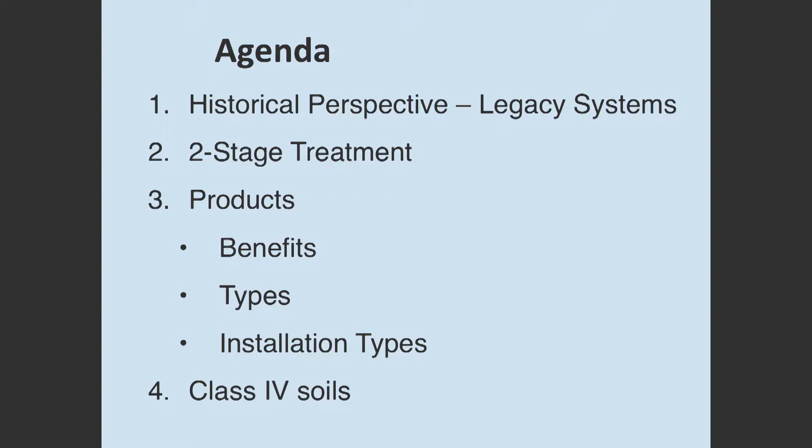All right, so we're going to talk a little bit about historical perspective, the legacy systems as I call them, and we'll talk about two-stage treatment. We'll go over the products and talk a little bit about class 4 soils, which are a little challenging.

All right, so let's give you the historical perspective. How did we get to where we are today? All right, so this device here was awesome. It was incredible. It did a great job of protecting public health.

It didn't do so good in the cities because the cities were too many people, and storm water washed everything into the storm gutters and rivers and streams. People really got sick in the cities, but you'll see if you've ever studied any history, there were times in the cities where everyone got sick and everyone went out to the country.

And that was the reason, because the cities couldn't handle it. So in the country, we did a great job until what happened? We introduced indoor plumbing, right? So depending on where you were in the country, this may have been the late 1800s, may have been early 1900s, but at some point indoor plumbing is introduced.

So it took all forms and fashions, but you see the outlet here and the one prior. Here you can see here it says to septic or sewer, so everything went out, but at the time we still only had this.

So where did the sewer line go out of the house? Well typically it went right into the base of this thing, right? All right, and it was a nice pit, but what was the problem? Not enough capacity, right? Too much water coming in.

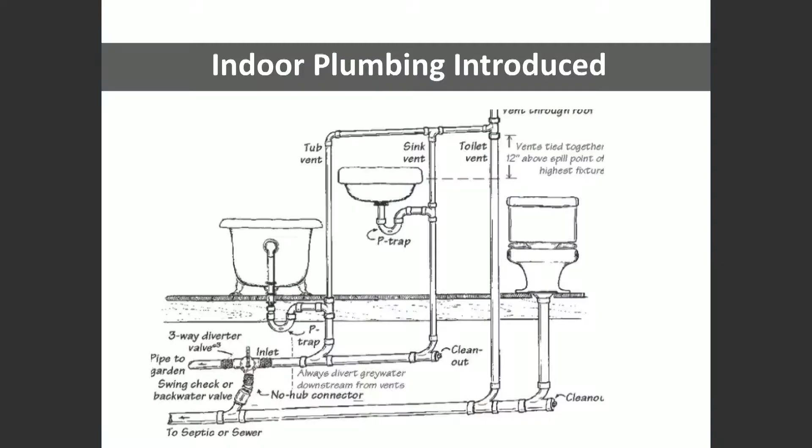So then we jumped to this. Okay, we had the pit and the pit latrine of the outhouse, and then we said okay, let's put in a septic tank to get rid of that because we don't need the building anymore. And then we put in the tile pipe. And the tile pipe at first, when they extended that out from the latrine, it was just open joint, dig a trench, open joint.

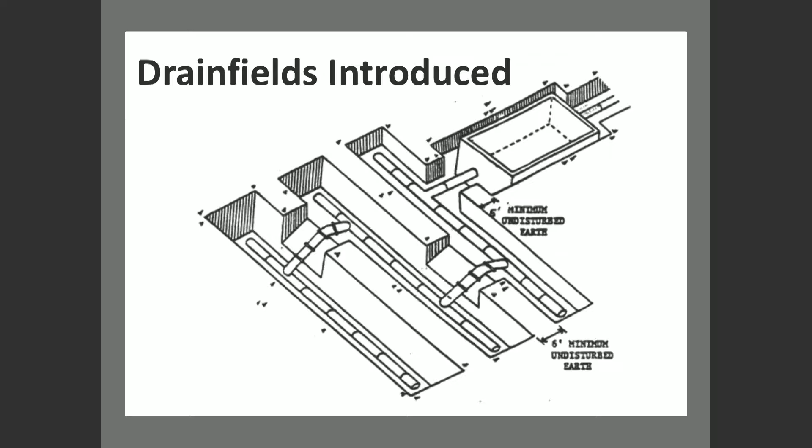And then someone came along and said okay, we want to expand the capacity of that. How do we do that? Oh, let's throw in some gravel, let's throw in some stone. So that's kind of the evolution of a drain field. Indoor plumbing kind of forced it to occur.

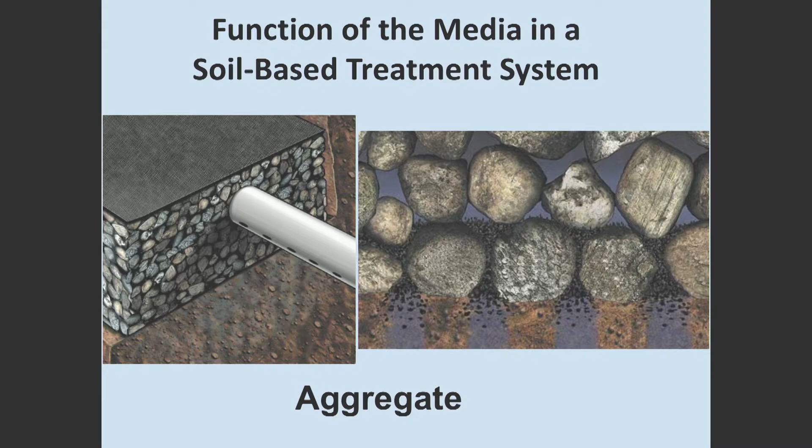So what was the function of that media? Why do we put media in the trench? [Audience: Storage.] Here it is right here, and storage is one of them.

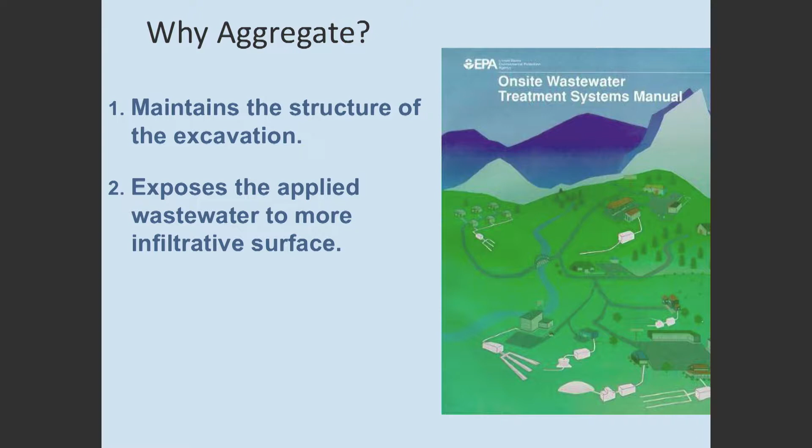Well, first of all, this comes right out of US EPA. It maintains the structure of the excavation. It exposes the applied wastewater to more infiltrative surface. Now what this means is when we had that open joint pipe, it created more area. And then it provides storage. So that's kind of the function of what the media is.

So stone is what we call a legacy system. It's from the last century. There are new products that we're in the 21st century.

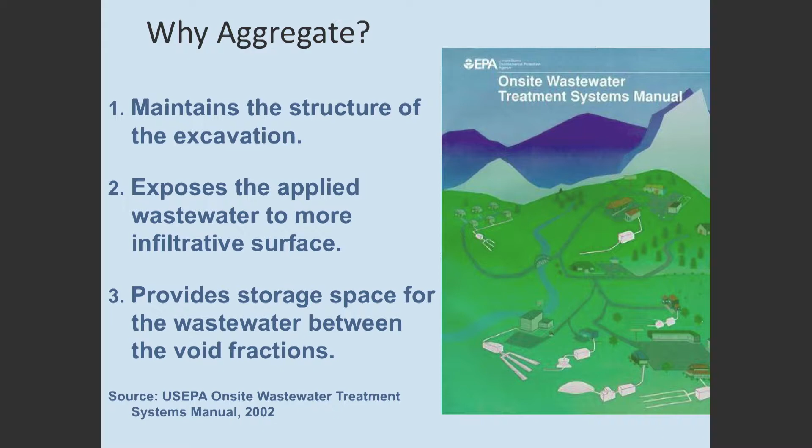New products are available. Why are they available? Well, there's a lot of baggage that comes along with those legacy type systems. For example, the fines associated with the system are very detrimental to system performance. They'll wash down or fall down into the infiltrative surface and reduce the permeability. So they'll cut down your perc rate. You thought you had a decent soil, and now it's just been reduced even more.

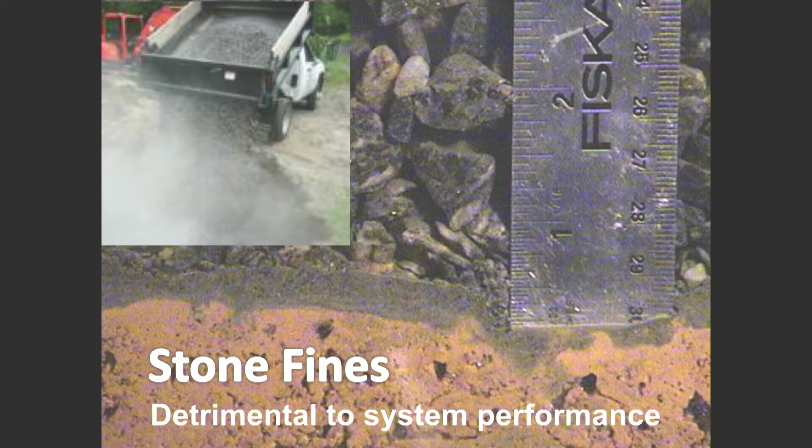All right, so why do people still use aggregate? It's cheap, okay. I think, what's our biggest barrier we face today?

Change is what it is. All right, very good. Our biggest barrier we face is change.

I gave a presentation similar to this where I had a similar slide last time. One guy said death and taxes. Another guy said his wife. And a bunch of the contractors, of course, said the regulators are the biggest barrier.

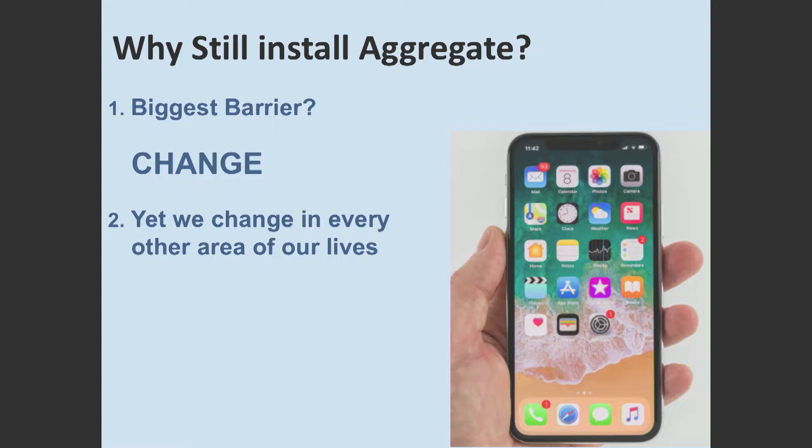But anyway, the biggest barrier we face is change. It really is, right? Yet I see change every day in the stuff we do. I mean, look at this - we got rid of the rotary dial phone. Everybody has a cell phone now. Think of the change we do take part in.

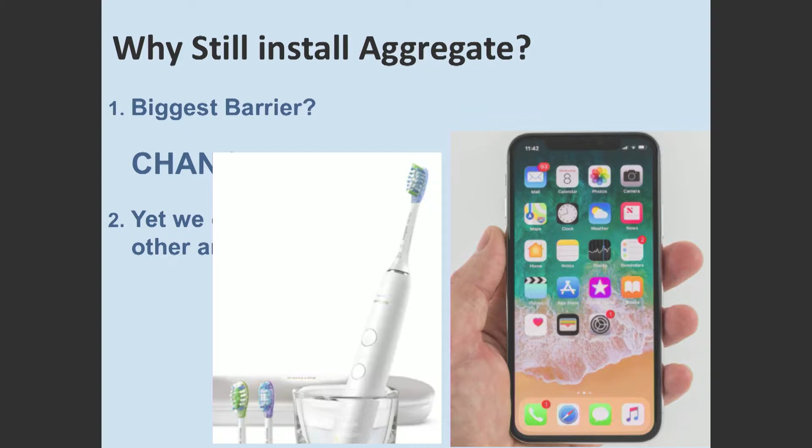I say, heck, even look at a toothbrush. It's like, holy cow, this has been designed by NASA. It's got all these shapes and rotators and electricity to it. I mean, look, everyone drives pickup trucks now - holy cow, you got anti-lock brakes for safety, you got airbags. We really incorporate change in everything we do, yet some of us are still stuck in these legacy-type products from the last century.

All right, so let's talk about the benefits of the different technologies that are out there.

Well, first of all, they're aggregate-free, or fines-free, right? So they're your answer to clean gravel. A couple of states - one's a real stickler that sticks in my mind is Massachusetts. The regulators will tell contractors to rip out the stone, it's too dirty.

They actually have a little test - they scoop it up and shake it, and if a certain percentage falls through, or they take it and put it in a jar and shake it up with water in it, and if it doesn't settle at a certain rate, rip it out. Rip it out, it's too dirty. Even though they require what they call double wash stone.

You ever hear of such a thing? It's still coming out real dirty, because if you wash it, you just get the top and you don't get much more. So these benefits apply to different people in different locations depending on where you're sitting on the fence. For example, if you're an engineer, you love the fact that it's an engineered product with fixed dimensions.

State of Virginia has this rule called 13 per 100. I say, hey, what's this 13 per 100? It's 13 tons per 100 foot of trench - trench is 3 foot wide, 12 inches deep, 13 tons. So I finally was going back and forth to Virginia after we had a big approval there.

I was doing a lot of legwork there, putting on presentations, training people, training regulators. Finally, I'm on the plane and I just start doing the math. Okay, it works out to 9 inches of stone. So they're, in effect, cheating 25%, even though 13 per 100 was the rule of thumb they always used.

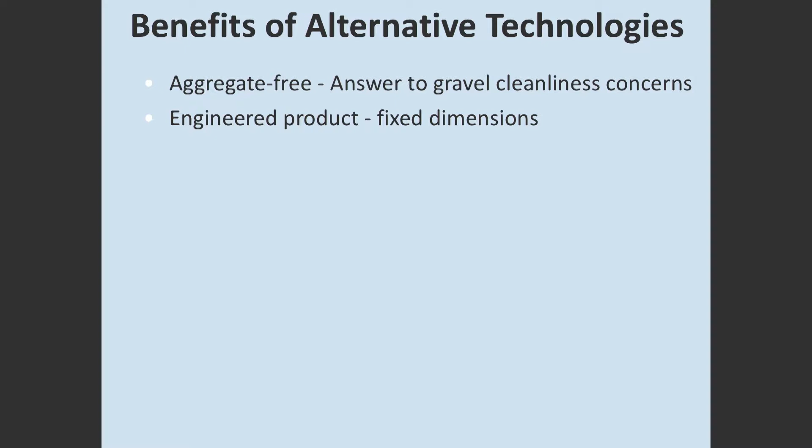So engineers want to know that if they specify a trench 100 foot long, 3 foot wide, and X deep, they're actually getting it - they want to make sure they're getting it.

All right, inspections - so regulators can easily inspect the system, they just count the length of the product. If they're in fixed lengths, for example, chambers, or panels as you know them here, can be 4 feet or 5 feet long. Easy flow bundles are 10 foot long.

Everyone uses sock pipe that comes at a fixed length, so it's real easy to inspect, and you're getting the right height, the right width, and the right length. So it makes it easy to inspect.

They also know - some contractors first didn't like panels as much because they had to dig their trenches level. Because if not, the chambers kind of went up and down, and the regulator would look and say, geez man, the trench isn't level, whereas he used to get away with that when doing aggregate trenches. But it's easily done these days - everyone has a laser level, and contractors are pretty good with their equipment now, so it's not a big deal.

All right, you can also offer, with alternative technology, shipping benefits - shipping, nesting ability to get products to you cheaper.

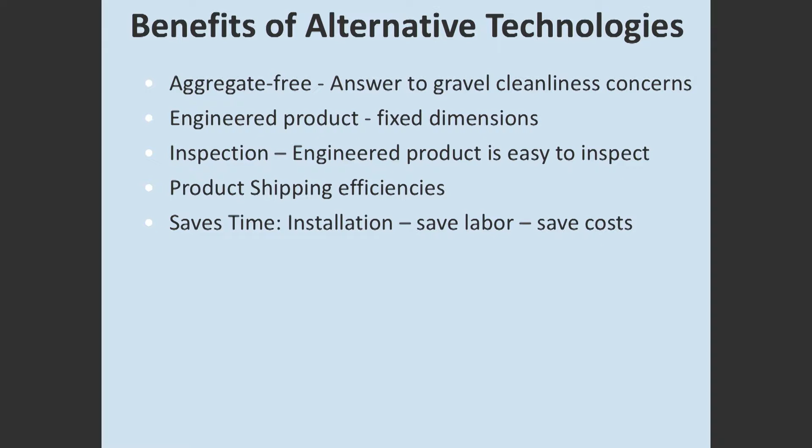If you ask the contractor why would you use an alternative product, it really comes down to time. They know they can do it faster, quicker, and to them, time is money. So you're going to save on installation time, which saves labor, which saves cost. Rule number one from the manufacturer is, doesn't matter what your idea is, how great it is, if it doesn't meet the almighty dollar of saving cost in some way, whether it be time or material cost, it's never going to work.

So contractors have discovered that. These products can be very lightweight, ideal for repairs. You're not damaging your site. Think of the site where, okay, we're going to bring in stone because it's cheap. We're going to dump it over here, big pile of stone. The dump trucks came, you had to wait for the dump trucks. Okay, they finally came, they dumped. Now you got to go scoop it up and then drive it over there and dump it in the trench and come back and forth as you dump.

You just damage the whole site. Now, if it's a repair, I'm from New England, and everyone thinks they have like the Augusta National backyard. They have the best lawn, and oh my gosh, we don't want to damage it. So they don't care about the septic system. They only care when you leave the site, the grass better be looking good. So if you can really minimize the impact to the site, again, ideal for repairs, these alternative products can save you a lot of hassle with that.

Field service, many manufacturers offer field assistance. Some products will offer increased storage capability. Again, engineers kind of like this for what I call peak flow event facilities. If you have a church, you have a facility like this. If you have, heck, we did Gillette Stadium, Foxborough. That has a chamber system underground, 1.2 million gallons a day, and it has the storage capacity to absorb that and then let it slowly meter out through the ground, infiltrate in over the course of time.

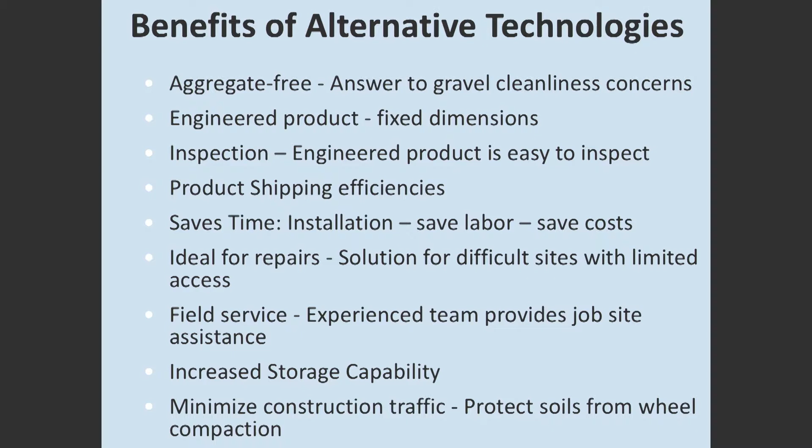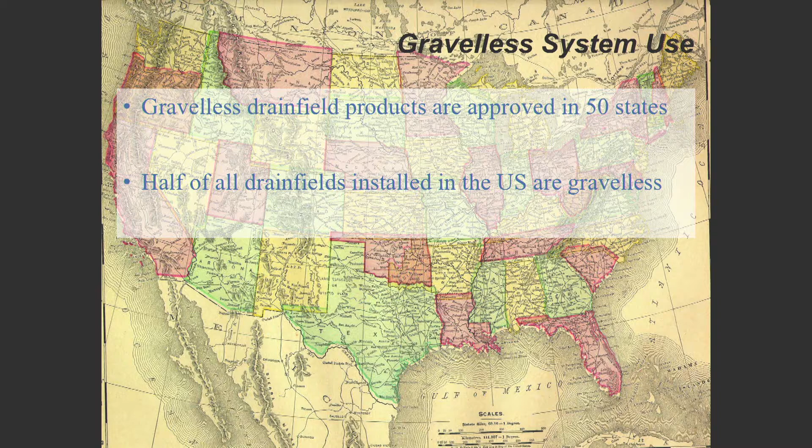And again, we can minimize construction traffic to protect the soil from wheel compaction. So what about nationally, these gravelless products? And again, there's all different kinds of gravelless products, it's not just what my company has. But they're approved in all 50 states, and half of all the drain fields installed in the U.S. are alternative products. In fact, from our stats with Infiltrator, just our chambers, 75% of all systems installed in 9 states are gravelless. And then in 16 states, 50 to 75% of the inventory of systems being installed are Infiltrator chambers. Quite amazing. Now it is becoming the de facto conventional technology.

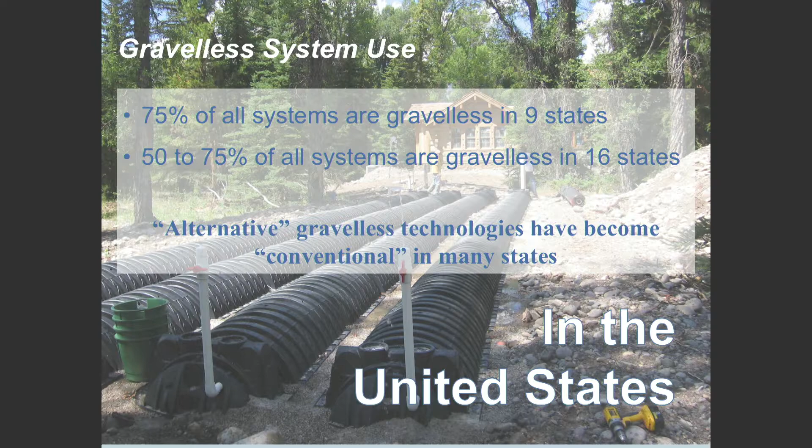All right. So I had this stage 1, stage 2. I want to talk to you a little bit about just the basic on-site wastewater treatment. And we have stage 1, what I call the septic tank. It's a great device because it requires 0 energy.

So here we have the tank, and is Texas a 2-compartment state? Yeah, all right. So the 2-compartment theory, and I say theory because I go to a state and I say, okay, you're a 2-compartment state. Show me your data why it's 2-compartment. What's the research? Why not 1 compartment?

Doesn't exist. There's 2 studies done, and both of those are a little bit weak because one entered wastewater into septic tanks that went from grinder pumps. That was a little suspect because everything was kind of really blended up and wasn't settling so well to begin with. And the other study was done at the University of Washington, Dr. Seabloom, which was a pretty decent study, but he looked at purely the physical aspects. There's a physical aspect of settling a piece of effluent particle, it's called Stokes' law.

So that's the physical aspect. The problem is we have 2 things going on. We have the physical process of settling, and then we have the biological activity of anaerobic digestion. So the problem becomes they're in conflict with each other. As we're trying to settle this particle that's trying to slowly settle down, all of a sudden there's these bubbles coming up, and they're being resuspended because anaerobic digestion in the tank produces gas.

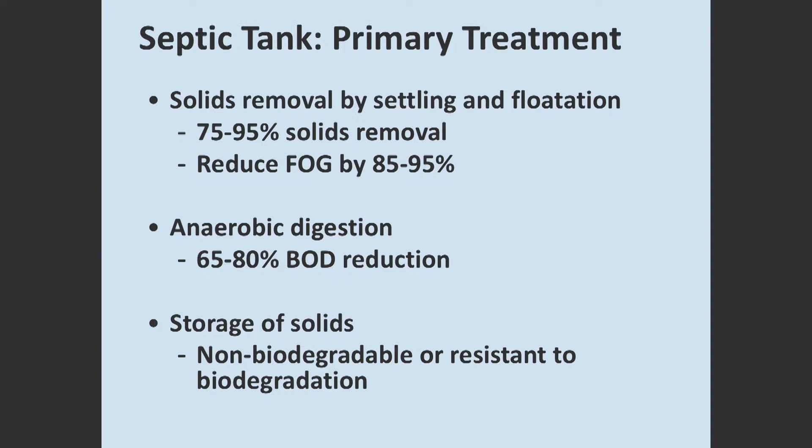So what's going to happen over time is you're going to burp solids, burp them out. They're going to get out to that drain field and end up plugging it up. So as I always say, tanks are cheap insurance. If you can go bigger, go bigger with the tanks, they can only help out.

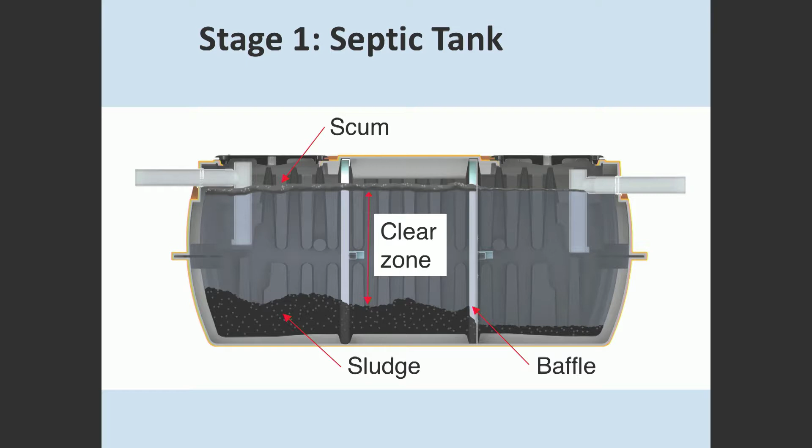All right, so we talked about anaerobic digestion, that's the process where we take solids and change it to gas form. So when we go back to that tank picture here, remember this tank is vented, right through the house stack. Not only that, in a gravity situation with a tank and a drain field, the drain field is vented right through this, and then this is vented right through this T and up and out. So as these solids are giving off gas and gas is coming from the drain field, we can vent it off. So that's where all these gases, carbon dioxide, methane, will vent off right through the house stack.

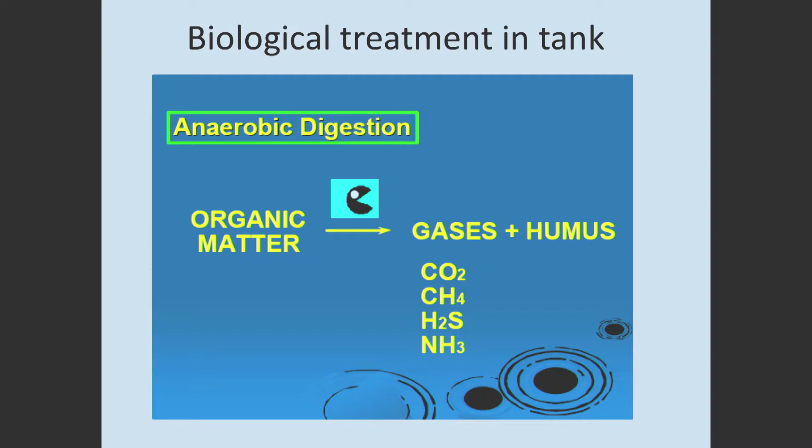That's why, as John was giving the talk today about confined space and septic tanks, you don't ever want to go into the septic tank because the gases are toxic.

Okay, so we talked about the first stage of treatment, the septic tank, which does a wonderful job. We talked about the second stage treatment, which is what? The soil, right, the drain field. So how does the drain field do it? The septic tank does primary treatment, the drain field, meaning the soils under the drain field, do tertiary treatment, and we'll look at that.

So where do we see that? There's many, many studies out there. I don't know if any of you have watched or researched any research on sand filters over time. It seems like every university has studied sand filters over and over, it's like why they keep studying it, it's already been done. Anyway, we look at the treatment level through 2 feet of sand media, it's pretty nice.

And it's that basis of understanding that we set our separation distances to groundwater, so we know we're getting a certain level of treatment. That's what Dr. Siegrist did at the Colorado School of Mines, he made what he called these big lysimeters, which is a fancy word for a big sandbox. He had 4 of them, and made them all very, very similar. We had to test them with clean water to make sure there were no preferential pathways, made sure they're all the same.

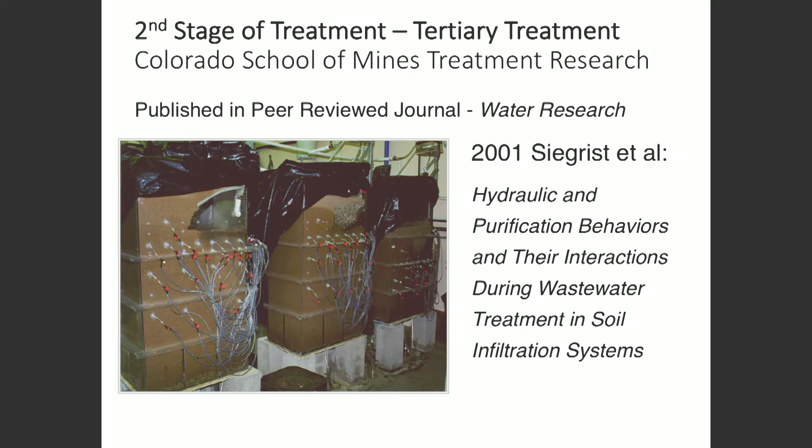And then he applied 2 of these at stone and 2 of these at open chambers, but that doesn't really matter at this point, we're looking at the treatment available in these systems. He installs the system, applies wastewater over time, for 48 weeks to reach steady state, over and over.

And you can see biomat development here, you can see it here into the soil. So what's going on there with that biomat? Is that biomat good or is that biomat bad?

I hear good, I hear bad, I hear both. It can be both? All right, so who said good? So why is it good?

That's where it's treating it, right? Now, when biomat becomes bad is what I would argue is that it's no longer biomat. That's when the homeowner abused it with burping solids, and those solids get out in that drain field, and they plug up this interface here. They plug it up. But people still dig it up and say, oh man, look at that biomat, that plugged up the system. That's bad biomat. Well, yes, it's bad, but that was homeowner induced, whether it be garbage grinders or whatever they were doing in the home.

They abused the system. But all systems should have a biomat, and biomats are good, and they should be healthy, and they should be thriving. So these are nice biomats here.

So why are they good? Well, what happens here is when we introduce wastewater to soil, what are we doing? We're feeding bugs, right? This is just a wastewater treatment plant, it's underground. All those soil particles have a lot of surface area, a tremendous amount of surface area. The bugs are just waiting to be fed, and they just love it, right? A lot of surface area and food, and the bugs love it, and it forms a biomat.

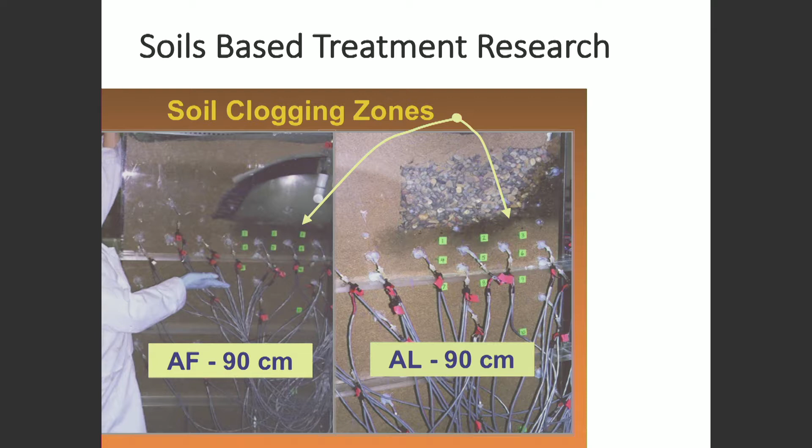So the overall theme here is the biomat is good. It's a good thing. Systems are designed for it. That's why we have the long-term acceptance rate. But yes, if the homeowner abuses it and that system gets sealed up, that's not good. But that to me isn't biomat. That's a clogging layer from the home. That's not a healthy biomat.

So let's look at the studies here that he did. So he had 4 different lysimeters.

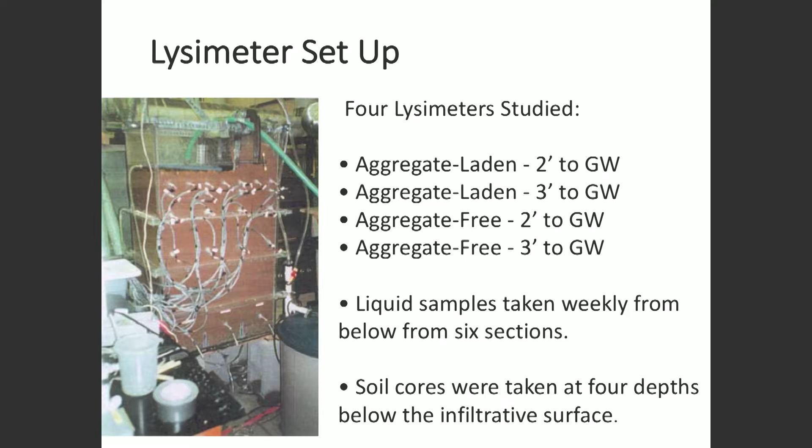2 were at 2 feet to groundwater and 2 were at 3 feet to groundwater. He's a research scientist trying to answer the question: what should the separation distance be? Because in some states it's 4 feet, some counties in California it's 5 feet, the State of Connecticut is 18 inches, and the State of South Carolina is 6 inches. So what should the separation distance be?

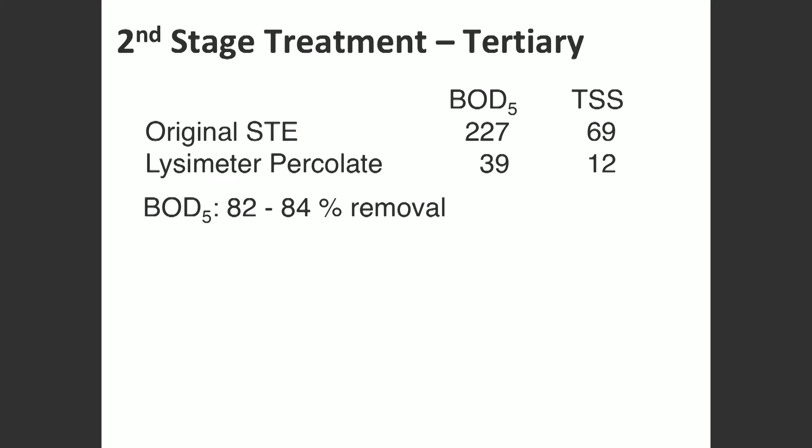So this is what he got. If the septic tank effluent for BOD was a little over 200, TSS a little bit below 100, the lysimeter percolate at the bottom was pretty low. It was about 82 to 84% removal on BOD. COD much, much higher, TSS up to 85% there. And the fecal coliform had a couple log removal, and he had excellent virus removal.

But the amazing thing was there was no difference between the lysimeters, whether it was 2 feet or 3 feet to groundwater, or whether it was the stone system or the chamber system installed. The chamber system was installed and loaded at a much higher rate to simulate reduction, because some regulators nationally were concerned that since the chamber system is reduced and loaded at a higher rate per square foot, maybe pathogens and viruses were getting through, or the BOD or TSS wasn't being treated as well.

Well, there was really no difference in treatment. Dr. Siegrist goes on to explain this. Why is there no difference? Well, because the soil has a tremendous ability to treat—it could even treat more, but that biomat is really a governor. It's regulating the amount of wastewater going through it, so it's limited by that biomat. And the important thing I like to say here...

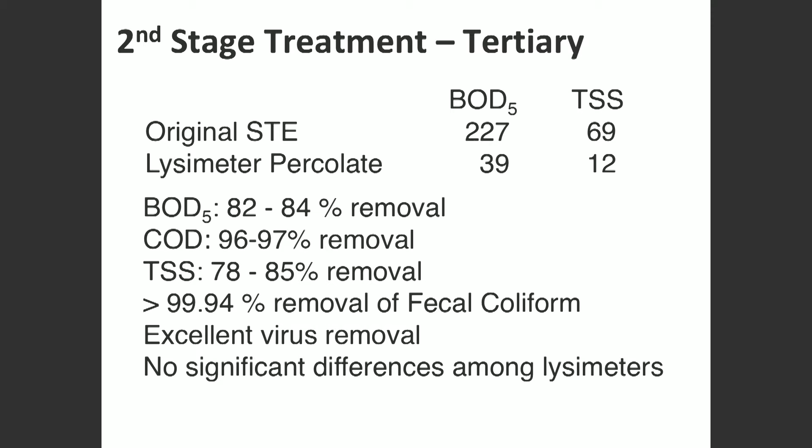All these systems, I don't care what product is installed on top, whether it be aggregate or any other type of advanced alternative drain field product, everything we talk about is really a soil-based treatment system. At the end of the day, it's the soil that does the treatment. We just have to get the wastewater to the soil in more efficient ways, with alternative products where we protect the soils, minimize compaction, and get rid of the fines. But at the end of the day, it's the soil that does the treatment.

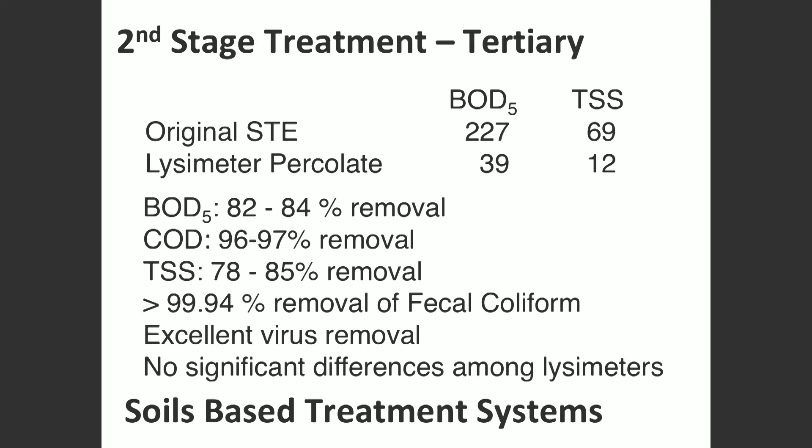So let's talk about these advanced drain field technologies. 285 lists a bunch of them: gravelless pipe is approved, mounded drain fields, and some other things here called wide excavation, evapotranspiration, LPD. So not only are there products, but there are types of installations that have been learned over time which fit different site conditions. For example, if you had a shallow depth of bedrock, maybe you could install a mound system—that's one of your options. There are other options as well, but that's one of them. So we have not just products, but drain field installation types too.

So of course we had the chambers, EZflow, drip dispersal, and then we have the spray systems here. Did anybody do the spray systems? They seem to be real common in Texas. I could tell you nationally, as I tell people in other states what people do elsewhere—for example in Texas—I might be, like last week I was in Missouri, and said well, they do a lot of spray in Texas.

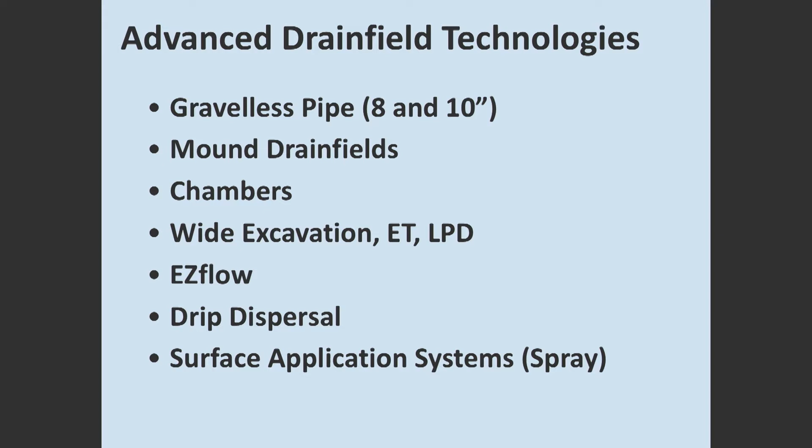Like, oh, spray? You're kidding? They don't do that. Spray? What are they, crazy? That's nuts. So anyway, it's funny as I travel state to state—if I cross a political boundary, the laws of physics seem to change sometimes as to what works and what doesn't.

So just a little bit about EZflow. Has anybody seen EZflow? It's not too big in Texas, but it's just an engineered aggregate product—a polystyrene bundle manufactured with recycled material. It's in netting, in 10-foot long bundles, and some of the bundles have a pipe in them and some don't. In a 2-foot wide trench, this is the configuration—we call it the triangular configuration. So those are 10-inch bundles, and this product rating is equivalent to a 2-foot wide trench.

So if you had a 2-foot wide trench, the table of number of bedrooms tells you how many linear feet you need—it'd be the same with stone as it was for this product in this case, so the sizing is equivalent. This is an engineered aggregate, so there's no fines involved. Most states approve this product with a reduction.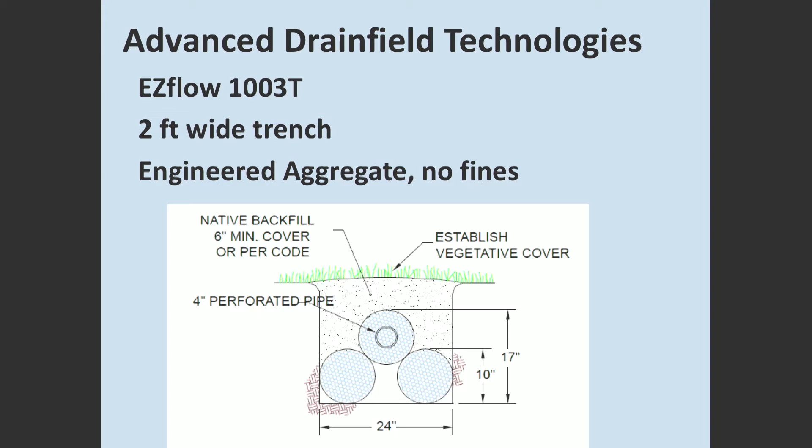All right, and of course there's the panels and chambers. There's many sizes and models. We have a Texas design manual that shows all of them, and because there's different sizes, different chambers have different credit ratings accordingly, according to the height and width.

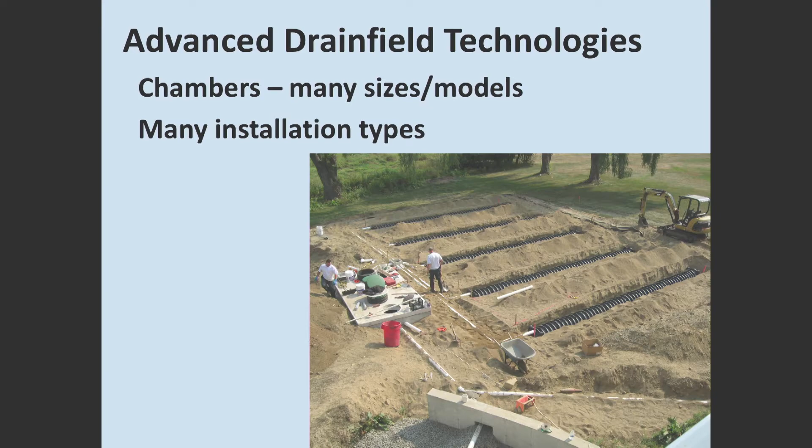Here's a typical trench. You have the CAD drawing, CAD layout. So in this case, this is our high capacity chamber. It's a 3-foot wide product. Now, it's funny, the chamber really isn't 3 foot wide, but it's a 3-foot wide product.

Just like anyone builds a house, a 2x4 is a 2x4, 2 inches by 4 inches? No. So our chamber is not 36 inches wide because your buckets are 36 inches wide, but if we had a 36-inch wide chamber, it wouldn't fit in the hole. Right? So we have to have a little bit of tolerance there.

So with 12 inches of cover, you drive over these with the rubber tire backhoe, no problem. All right. We do have systems different than this one. That's what we call H20 traffic loaded systems. Anyone install any of those? In that case, it's not the chamber that's H20, although we have an H20 cross section.

The cross section goes like this. Dig a trench or a bed, depending on your design. Lay down 3 inches of stone, put on our H20 chamber, which is different than this chamber. It's the older models. Remember the 6 1/4 foot chambers? Those had a thicker wall section. It's virgin plastic, it's stronger plastic. These are recycled plastic.

All right, so you put down 3 inches of stone, put the chambers down. You backfill with crushed stone. Okay, so we're using the stone for a structural known quantity to get a higher load rating.

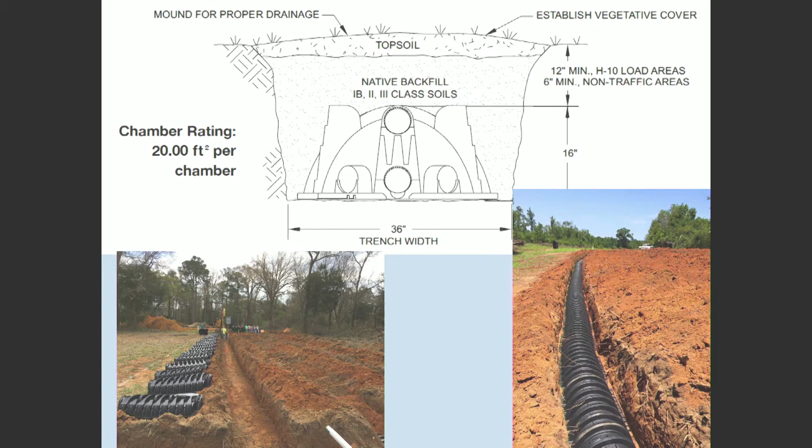So we have a Texas design manual. Many of you have seen it, but many manufacturers offer similar charts. If you have, you know, X type of soil and X number of bedrooms, then okay, this is the amount of product you need. So those are readily available. Again, many manufacturers, all their products offer the same thing. I just wanted to show you that.

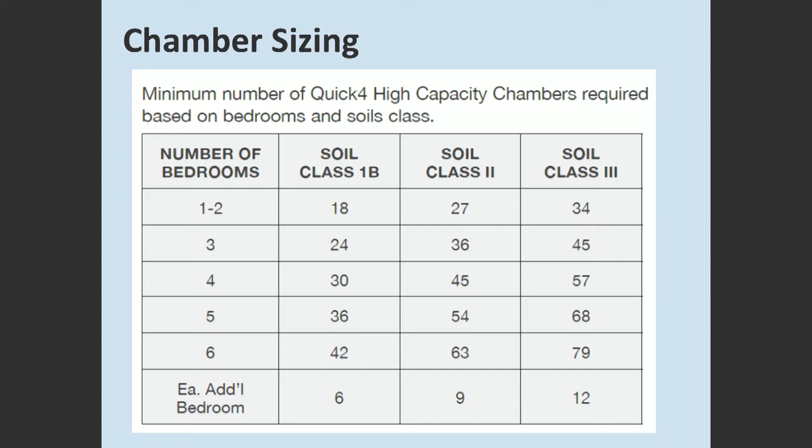All right, so we talked about change, right? What change do we see? We're an Infiltrator, we're a national company. I can tell you, it's great to see some younger faces in the crowd, and the younger guys are, you know, more, I don't know, incorporate change and, you know, electronics and both into their business and everything else.

But what we see is you don't need to have the huge triaxle dump truck, you don't need to be carrying the huge excavator behind it, because now we see this more and more often. Heck, those younger kids who are ambitious, they get a heavy-duty pickup truck, they get a trailer, and there's their system. Off they go. Then maybe they have a mini excavator, they go grab that next. They don't need to have a big one. So they're in business, and they're in and out quick, and they can do a lot of systems per week. So this is the kind of change we see.

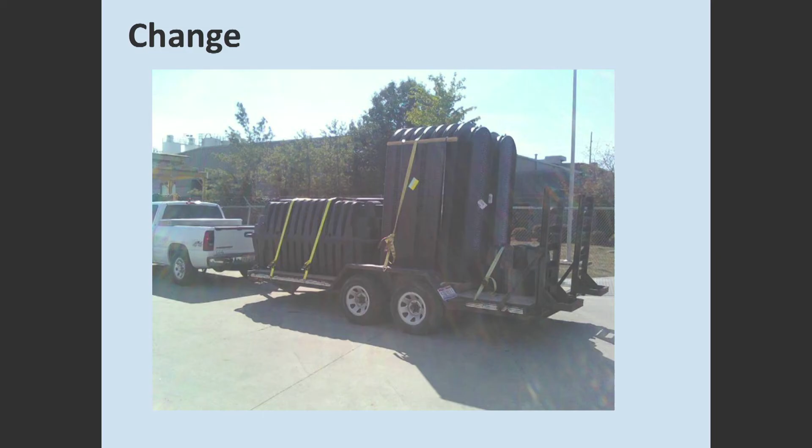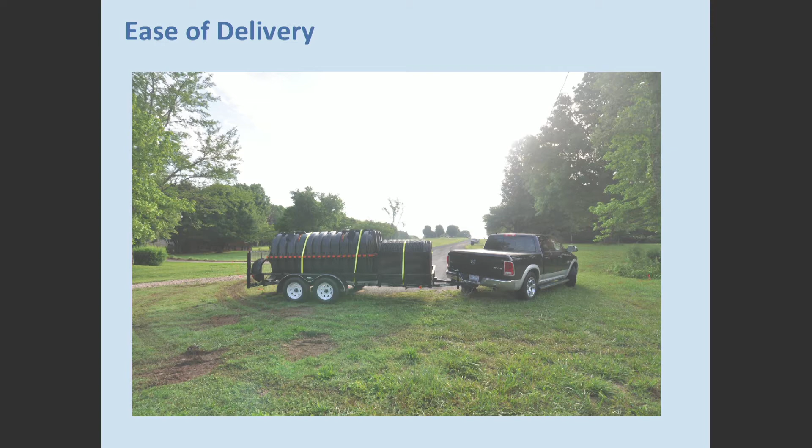Easy delivery, get in and out of the site, not waiting around for dump trucks to deliver stone. We've had many guys who made this change who have triaxle trucks, and they said that's great. They're still using their trucks to haul to other sites, other jobs, small road jobs or a house excavation, bringing in material. They're still keeping those guys busy. So it's a way to expand his business.

All right, so I wanted to talk to you here. What do we do here if we have this type of soil? All right, so this is a class 4 soil. What are my options?

What's the biomat do in the class 4 soil? Biomat grows at the surface and stays at the surface.

All right, so this is the story I was told about. I said, oh, why, you know, again, I come to Texas a lot. I love coming here. I said, why do you have spray? Well, I was told it's because of soils like these, right? I mean, heck, we don't have spray in New England because we're blessed with the glacial period, and they deposited sands and gravels. We have a lot of bedrock, a lot of rock, but we have sands and gravel, so there was never a need for spray, right? But you go through here, the black belt, the gumbo clays, and they come all the way down Alabama, right through Mississippi, Louisiana, and come into parts of Texas, right all the way down to Houston.

So I'd be the one to tell you, hey, I love to put in drain fields everywhere, but you can put in a drain field in this, and what's going to happen? It's not going to work. Right? So they had to resort, give me a solution, give me a solution. So somebody said, all right, let's spray it. So by default in Texas, you probably had to spray because of these soils. Right? So what can we do here?

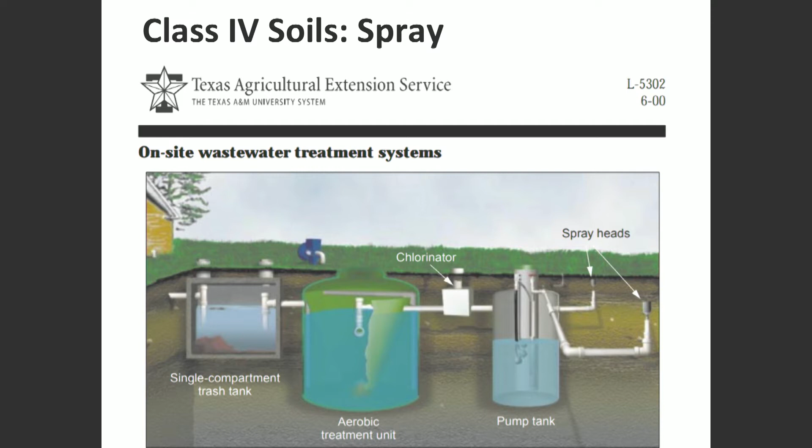But then we get, okay, what if a homeowner has a tight lot and wants to have kids play in the backyard, but we don't want to have spray? Well, what can we do? Well, you can go to an ET system, right? Anybody do ET? I don't think it's too common because it certainly wouldn't work in the Houston area or along the coast, right? Because for an ET system to work, the rate of evaporation has to be greater than the rate of rainfall. So pretty simple.

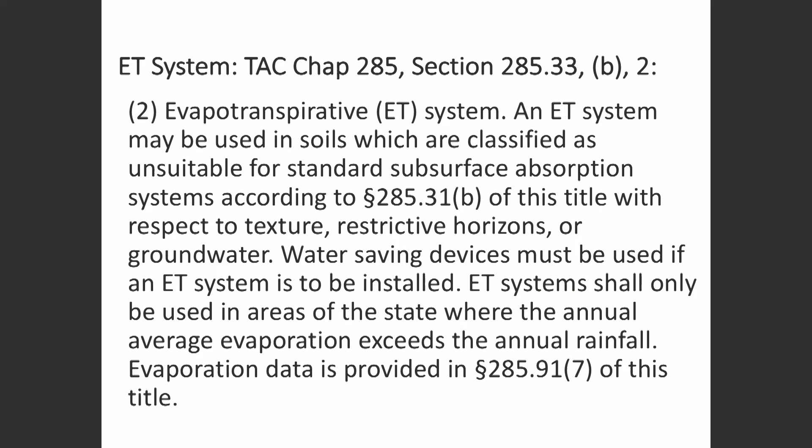And this is the quote right out of 285. I won't read the whole thing, but basically what you're looking for there is 100% of your water to go up, to evaporate, evapotranspirate. So the roots are going to uptake it, and the roots are great because it also gets rid of the nutrients, the phosphorus and the nitrogen. But again, so it's just another kind of tool to have in your toolbox. If you're doing systems in western Texas where it's drier, that would be a good one.

All right, you can also go to drip, right? Some great slides on the last presentation of drip.

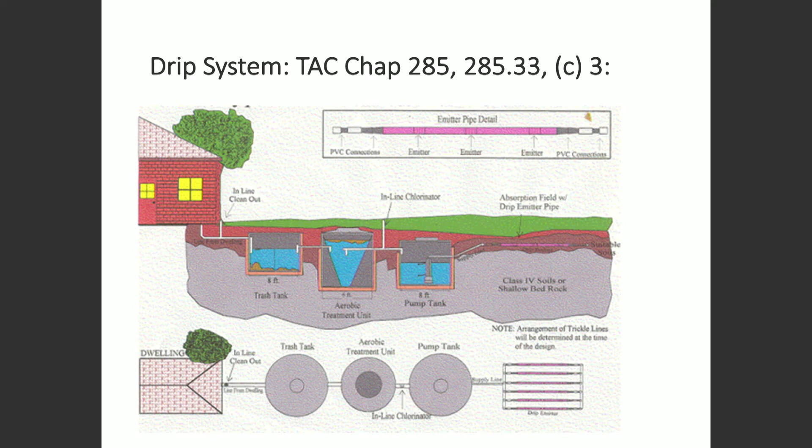And again, trash tank, treatment unit, pump tank. What this doesn't show here is maintenance to get at the flushing mechanism and the filtering system. And then you go out to the drip field. Here we have a large drip field, and you can see all the drip lines going in, coming back to the manifolds and headers to allow it to pressurize equally.

Raise of hands on drip. Who does drip? Okay, yeah, so it is pretty common. It's a great solution. Again, I got calls from all over the country.

I told you the one about the big pipe guy who says, hey, what's your cost per system per gallon? The other one we get is, how many of those chamber things do I need? Right, we got an 800 number, so people call us all the time. How many chambers do I need? So what would be your answer if you're sitting in my shoes?

I don't know. Usually that call comes on a Friday afternoon, because what do you think's happening? The homeowner's doing it with his buddy who has a backhoe. Oh, how many of those chambers? So my response is, hey, it says right on your permit how many you need. It's right there for you, right? Oh, well, how about what do you think I need? I only got two bathrooms.

So anyway, I try and talk to them, and I just tell people, look, you want to get a permit, you want to hire a licensed contractor, because if anything ever goes wrong, you don't want to sell the house without a compliant system. So anyway, that's what I tell them, and usually they hang up a little mad at me.

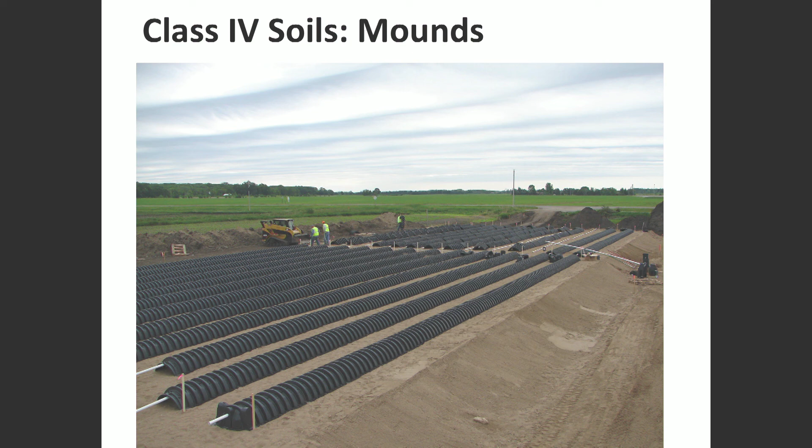So we ended up, it was class 3, class 4 soil, the best I could get from him because he's not a soils guy. Water table was fairly shallow, about 18 inches deep. So we just bring in the farmer's till, we till the whole area. I think it was over 4,000 chambers, we till it all in place. We bring in a foot of sand, put that on top. We throw chambers in a bed form, chamber, pressurize it, and we cover it with 4 feet of wood chips for insulation. Mulch, because they cleared out their forest and had all these wood chips to get rid of, and it worked great as an insulation source. So anyway, just another funny one for you about dealing with engineers calling up on the phone not knowing what to do. All right, so that's really it.